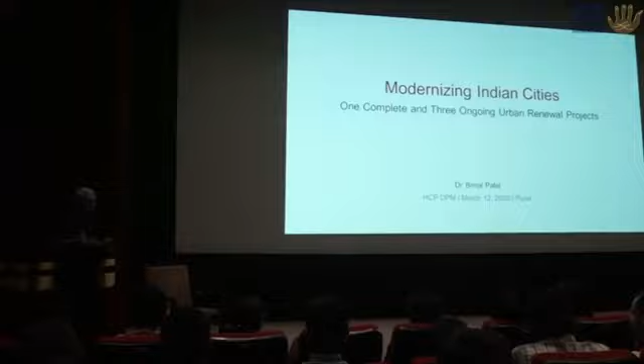So I'm going to talk about modernizing Indian cities. That's the big agenda. I think we live at a very special, important time in India. India is going through an epochal revolution. We are becoming urban, and every country in the world that has become urban has had to tackle the challenge of making its cities function well. We go to all these wonderful cities in the West and like to go there as tourists, but God did not give them these cities ready-made. They too industrialized. The Western world also messed up its cities. You can easily Google and find the history — just look at 19th century cities in Europe, you'll see images. They worked hard, tackled the problems, and modernized their cities. They did this at a different time, with some advantages and some disadvantages.

We have our own advantages and disadvantages. One of our biggest advantages is that we are latecomers to this process, and we can learn a lot from processes abroad. We have disadvantages too, because we have larger numbers, we are a poorer country, and we have democratic institutions far ahead of all the other revolutions that have taken place. So we have our challenges to tackle.

Depending on how well we tackle the challenge of modernizing our cities, we'll either come out of this process as winners or as losers, because countries that have not managed their urbanization process well have got stuck at lower levels of productivity and very problematic social situations.

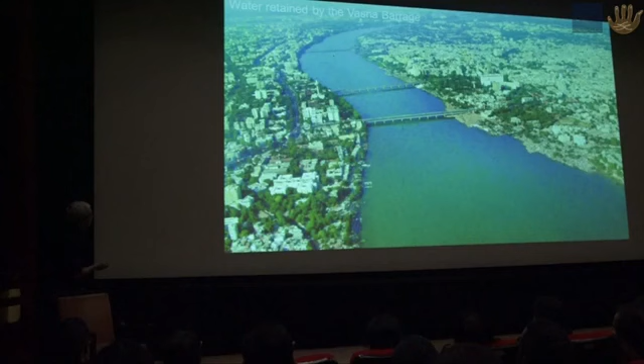So we had a seasonal lake in the middle of the city since 1976. A few months after monsoon we would have water, and then it would go away as soon as the water was used up for irrigation. It would be an empty riverbed, and the river would start looking like this once again.

Then, after that, the Narmada Dam was built, and as Ram explained, a canal was built to take water up to North Gujarat and Saurashtra, and that happened to go past Ahmedabad, just upstream of the city. Once this canal was built, we had the possibility of taking water from the canal and putting it into the river for irrigation.

This made it possible for Ahmedabad to have a perennial lake in the middle of the city. All of this happened without any reference to Ahmedabad — this was for irrigation and flood control, and none of it had anything to do with the riverfront project.

Once this lake got done in the middle of the city, we have this sort of a lake. You can see this river sloping down from here to here. Here's the barrage, and therefore there is deep water here, and then slowly shallow water here. It's like a swimming pool — the bottom is sloping.

We had a landscape full of lakes earlier. Now we had a large lake in the middle of the city. Now we had a lake, but it's not in very good shape.

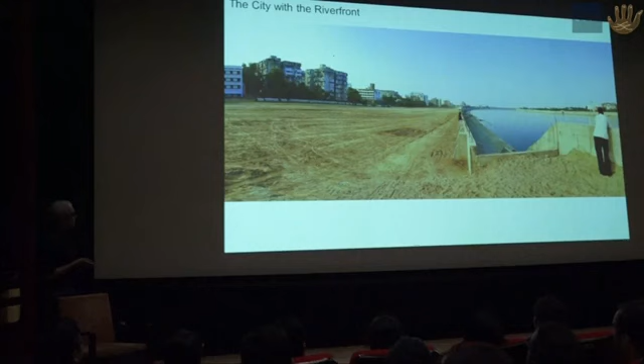On the project, we developed many techniques to visualize the project and show it to people. We would have a photograph like this and then try to show - these were large drawings we made. We made exhibitions of this sort to try and show people what the riverfront is going to be like.

And finally, the project saw the light of day and it happened. Today, Sabarmati River has a riverfront that is accessible for everybody, which means that in this river, we built embankments on both sides and reclaimed land, like in Marine Drive.

This is one picture - you can see the wall being built. This is the reclamation work. It's a huge amount of work. It's not very sophisticated work, but it's just large.

The river used to look like this in 2001. And here you can see in 2006, the work has started here. And in 2009 and '15, and that's now the river with a public realm on both sides of the city.

A river that used to look like this, today looks like this. It has - and like this, it looks like this. So this is lots of space that was created. It's a river without sewage.

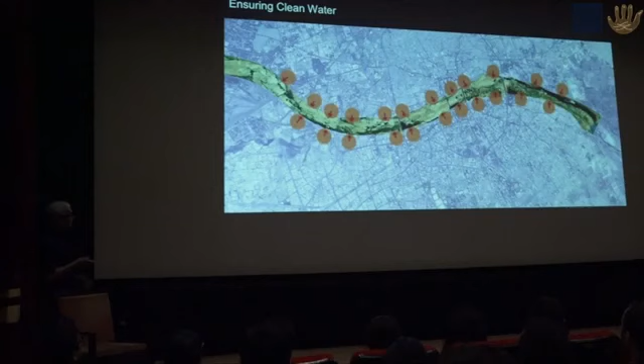All this sewage that used to come in has been diverted through interceptor sewers. This is the sewer being built, and the water is now more or less clean, though there is still some work pending. It's a river for recharging groundwater, and the sewage treatment plants treat the water and put it back into the river so that we have a grand recharge mechanism. This work is ongoing, but there are other plants that have already started.

It's a river without slums. 11,000 families were given housing in all these red spot areas within the city. You can see the houses were of this sort, and that is kind of an interior view of one of the happy homes that was built.

So 11,000 households. The project, I think Ram made a statement, it was not 11,000 crores, it was 1,100 crores, and the project cost was 1,200 crores. This is the cost of 2 5-star hotels. Okay, 2 5-star hotels is the cost of the entire project.

Anyways, no risk of flooding. Ahmedabad river used to flood, and everybody who could afford it had built walls of this sort. Now there is a common wall, and you can see the river in flood here. The lower level is submerged, but next day, after the water recedes, it becomes once again a usable place. It has to be cleaned up a little bit.

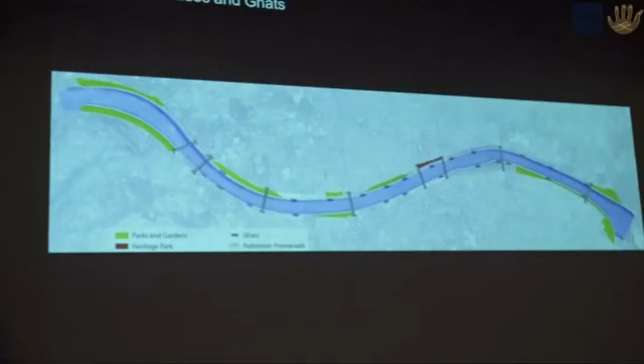It's a riverfront with parks and promenades. You can see there are many new parks along the river. That's the kind of view it was when it was opened up in 2012. It became a place of pride for the city.

Here's in the monsoon, and here's people sitting there. It's a place for all sections of society. You can see here boating and exercising, and there are parks of this sort. This is a picture from 7 years ago, and that's a new park that is coming up shortly.

So it's a riverfront with many amenities. That's a huge open-air market for poor people. It's the flea market of Ahmedabad that you can see here. It's a Sunday market, which it was claimed was being wiped out. Here that's the kind of market that you have in place.

These trees have also grown. They will also grow more. This is a laundry facility for all the dhobis who used to be there.

This project has revitalized the city center. You can see many new projects coming up along the riverfront. All the developers are advertising their projects along with the riverfront. They are also paying for their FSI, so the city has a new income source.

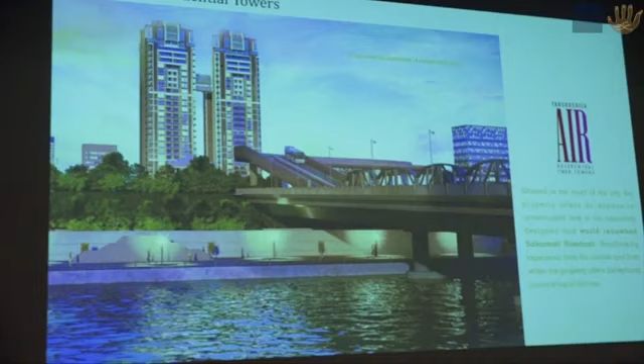Here are some other projects. These are from developers' brochures, and here are places like this from which you can enjoy the river view.

We have a better street network. We used to have a poor street network, north to south, and this new street network was added because of the project. This is one of the views of the streets. Here's another view of the street. There you are, that's another view.

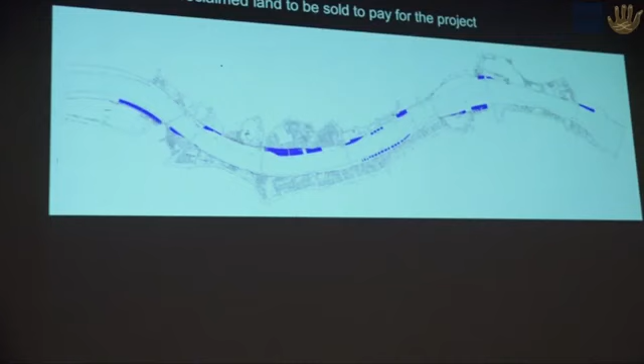It's a self-financing project, no taxpayer money to be used here. It's a project that costs 1,200 crores to build. If you take the housing, it's another 1,100, so 2,400 crores, that's with interest. And these patches of land, the blue spots, are to be sold to recover all of that money. That's, for example, a patch along which small portions will be sold, and maybe something like this will come up.

So it's a project that has made Ahmedabad citizens proud of their riverfront. This is, in a sense, proof that projects like this can be done despite our fractious and difficult democracy. We don't need to be like a very authoritarian government. We can still do projects.

They have to be structured in a certain way. They have to bring benefits for everybody. They have to make sense for a large number of people. And you have to implement these projects well. So that's the proof that some of the rest that I'm going to talk about can actually happen. Okay? So let's start with the Mumbai project.

So that's one of the 3 ongoing projects that I'm going to talk about. So the opportunity—now you see that's Mumbai here, that's Marine Drive here. And normally we see this edge of Mumbai. This is where that big bridge is, and we see the western side of Mumbai city. On the eastern side, all of this is the port of Mumbai.

We think of everything as a zero-sum game. There are activists who say, I will save every tree and everything else be damned. There are activists who say, I will save heritage buildings and everything else be damned. They are like people fighting for their roadside shrine, saying, I will save my shrine, the traffic be damned. We have to figure out ways to turn such zero-sum games, you win, I lose, into win-win games, into situations where everybody wins something.

I think the Sabarmati project essentially came through because nobody lost, everybody won out of it, despite the fact that there were many activists hollering away, saying either this or nothing else, only green space, you can't sell land, you can't do this, you can't do that. Nothing. Eventually, the city people said, enough, we will do this project because everybody gets something out of it, and everybody has to therefore also compromise something.

Everybody can't get everything with nobody compromising. Somebody has to compromise, and that's the art we have to learn, and that's the art we can teach through urban design. Okay, so that's what urban design has to be about. That's the sort of subtext you will see in all of the projects that I do here.

So first, let us look at what the urban design vision is. I'm going to turn on a film, a 2 to 2.5 minute animation that tells you what this project is about. Are you going to turn it on?

That was just a visual of how we believe the Mumbai eastern waterfront might look when fully developed. But what are the ideas underpinning this vision, and what are the urban design elements? Since a large portion of the audience is urban designers, architects, etc., I'd like to focus on some of these ideas.

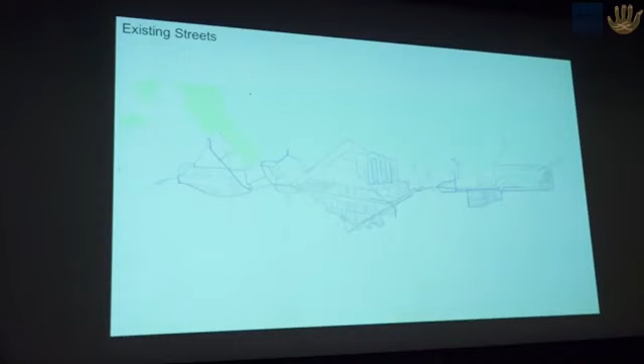Here's the large piece of land we're working with, about 7 square kilometers, and a dense street grid is at the heart of this plan. To draw this, we looked at the existing streets in the port, since the port already had some streets. We decided to use many of those streets, perhaps widen them, using those alignments.

We added more streets and came up with a grid that matched the grid of the rest of Mumbai. So this is not just a grid of streets standing by itself, but integrated with Mumbai's streets. Let's take a closer look at this.

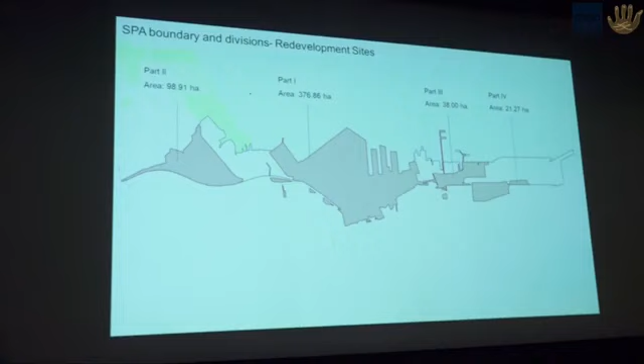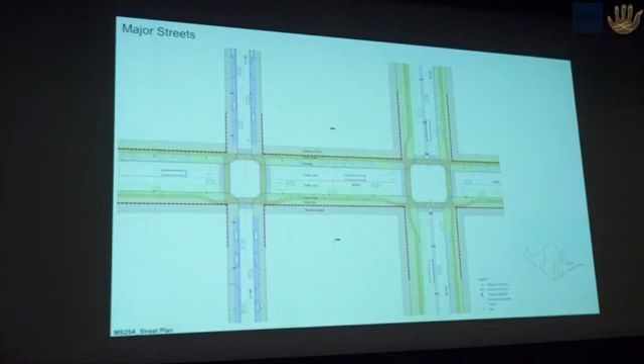Of course, the street network is also hierarchical. It has functional hierarchy, and has been detailed with considerable care. As you can see here, this is the design for the major streets. All the other streets have also been detailed, and this is the urban design vision for those streets.

But what's important here is that we shouldn't forget, as urban designers, that streets are at the heart of any planning assignment. At this stage of our development, the most important thing is to make adequate space for streets.

Though not impossible, it's very difficult to improve a street network once everything is built up. You can see that very clearly. In another project, which I won't talk about today, we're looking at how to improve street networks in existing cities, but we'll not take that up now. Here, this is more or less a greenfield site, so let's talk about how another one like this was done.

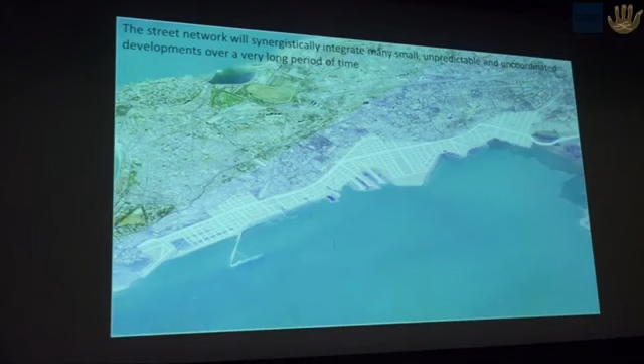Once you have a street grid in place and are able to get that space for streets, cities grow incrementally in unpredictable ways, and a street grid is the only frame that can hold a large urban development together. So we focused first on the street grid. Once the grid is in place, something will come up. The land will get freed up slowly as leases get over, and bits and pieces of the city will come up, and over time it will all fall into place. It's not one grand vision realized in one day, but incremental development, uncoordinated, messy you might say, but the street grid is what holds it in place.

Second, public transit is very important, and more important is to integrate it with your street network. There's lots of public transport planned for this area, but the important thing is to integrate it with the fabric of the city and with the city streets, and that's what's been done here. The metro alignment has been carefully changed so it matches our street network. It takes a lot of work to bring all the agencies together, and that's the work involved in urban design - your coordinating function. You're nothing but a coordinator at that level. Then you see from all the stations what the walking distances are and how you get to them.

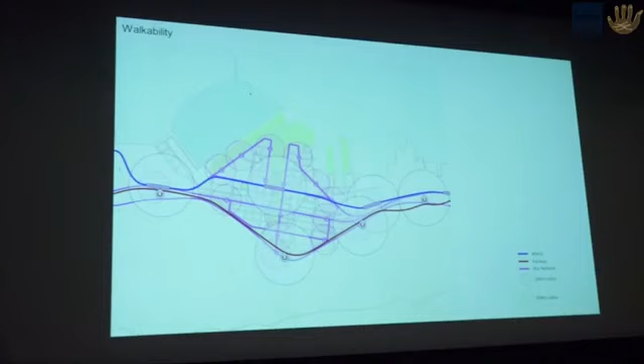Integrated and upgradable infrastructure. Once you have a street network, you can put in all the infrastructure you need - power supply, water supply. You can work out the sewerage strategy and solid waste disposal strategy, and on the street work out the ways to put in all your services. But the key insight is that infrastructure of any city in the world is not built at one go. Nobody builds world-class infrastructure at one go - everybody improves upon their infrastructure. So for all the people who ask, have you done the infrastructure, I say, my friend, which city in the world has built its infrastructure on day one?

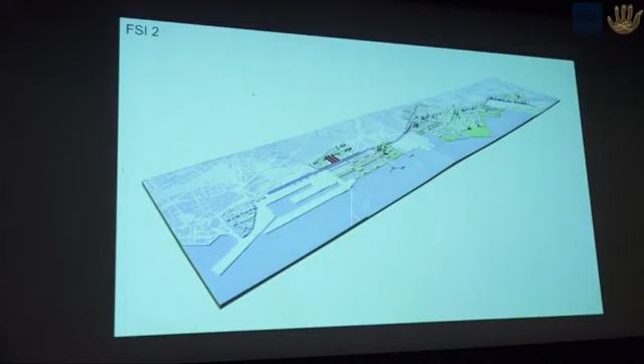But we believe that later on, the next generation will say, oh my God, these people were very timid. Let's put in more infrastructure and build more. And we believe that after that, they will build even more.

Even when they come to this level, they'll be nowhere near Manhattan, because that has even more floor space. That doesn't mean there are more people. What happens is people become richer and they consume more floor space as societies become richer. And that's the story the world over, including India up to now.

Adding more floor space does not add load to infrastructure. Adding people does. So don't limit floor space. If you can't limit people, just add more floor space. I don't want to get into much detail here.

Now, here's a very important point of this plan. Indian cities—I'd like you to look at this particularly carefully, because it's a very important thing that all urban design people should understand: we use our land very poorly. What do I mean by that?

If you take Ahmedabad, I showed you, and we took these 500 by 500 meter squares for study. If I take this one square here in the center of town, right next to the river, that's what it looks like. I'm sure Pune looks like this too, and most of Pune looks like this. If you were to study the land use here and divide it according to the categories I'm telling you—not what planners use, not residential, industrial, and all that sort of stuff, but like this.

First you find out how much is in public streets. This has got all completely washed out here, but about 16.8% of the land is in streets. I'm sure Pune gives you similar numbers. How much in public open space? Very little. Streets and open space together make the public domain of a city, and most Indian cities have no more than 20% of their land in the public domain.

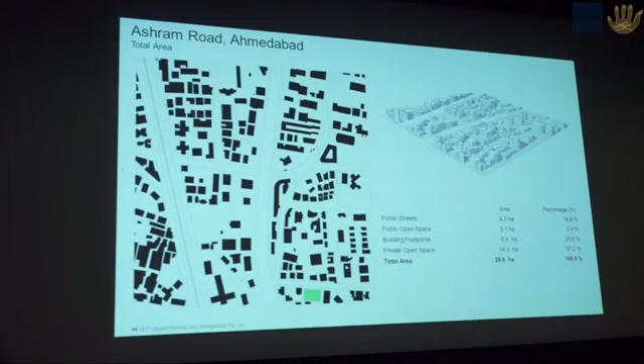All that 57%—sorry, there's something wrong with the slides here—but if you look at this, all the 57% is the private open space that we are forced to leave around buildings because of building bylaws. And that constitutes a waste in Indian cities. All that red land is the private open space that cannot be used legally, and this we end up using suboptimally. You see, all our cities look like this.

They have lots of tiny fragments of space like this. It all adds up to 57%. Nobody makes that calculation when they are making the rules. But the rules end up forcing you to do this.

And how do we use these spaces? They are not very well usable. You know, as designers, look at these spaces. These are not, you can't grow trees, you can't play a cricket game here. I mean, you can romanticize about this, but when space is scarce, this is a waste of land.

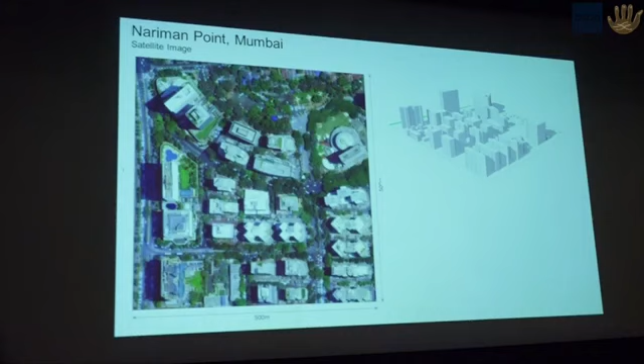And I urge urban designers to actually walk around in cities and find out how these slivers of land are used. You take Mumbai, you have the same story. You take Nariman Point, the costliest piece of land in the country. This is what it looks like. Once again, if you look at the figures, you see 53% of it is in private open space that cannot be used. Ridiculous.

It's very easy to do this research, it's Google Images, nothing else. Other cities in the world, take London, go and check it out. Here you have almost 30% in the public domain. So already doing 1.5 times better than us.

No wonder their streets are walkable and we all go there as tourists. And their building footprints are, what's that, 65%? They know people want more ground floor space, so they allow it. Planners don't stop them from using it, they actually allow them to use it.

And then you have private open space, which is very little, which is 4.8%. You will see that in every city in the world.

San Francisco here has 32% in public streets, and parks and gardens 36% in the public domain. You can see 61% in building footprints. Now this will change as you take a square of the city, but this is an average. And private open space is this.

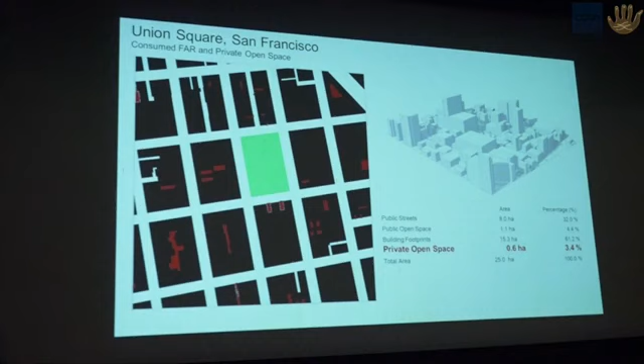We can say that generally speaking, in Indian cities, that's the situation: 20-25% in building footprints, 20-25% in public realm, and a big waste of 50 to 60% in private open space, and this is done by bylaws. Man-made. There's nothing that tells you to do it this way. Now, in western cities, 50 to 55% in building footprints, 35 to 40% in public realm, and 10% in this private open space. No wonder those cities work better.

So we have to learn how to make cities of this sort, and this is what their cities end up looking like when the land is used efficiently. That's Lyon. Look at this pattern. Go on Google sometimes. It's a terrific pattern.

You can see that all the private space is also really well shaped in the form of courtyards here. You can see you have wonderful streets, you have parks, you have gardens, and you have a vast amount of floor space. Okay, that's what we have to try and do.

Now, our cities look like this. They are neither garden cities, nor they are cities. And here's Mumbai. I mean, can you believe it? This is a ridiculous waste of land. And this will be Pune, and this will be Delhi, and this will be Calcutta, and this will be every Bangalore. Everything is like this. Ridiculous. And we haven't paid attention to this issue for years.

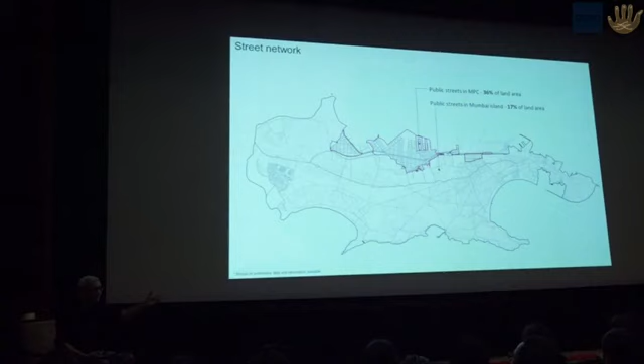And yet I have some people who are purists complaining about public space. This is a development which we are going to do where we monetize land but put 62% in the public domain. And if I take the building footprints, 24% in our area, 27% in the rest of Mumbai. So we're not putting in more, we're not concretizing the place.

What we are doing is we have undevelopable private land at only 12%, in the rest of Mumbai it's 43%. We are taking all that waste and turning it into gold of public domain.

Now that's the same figure here, giving you 1.5 FSI, 1.33 gross FSI. So that's what the Mumbai plan is. That's, I think, the winning issue in this plan. And this is what I feel like saying, well, this is how the mill land should have been developed.

Many urban designers want to be concerned about the big problems of our day. I am also concerned about the big problems of our day. But I think our job is not to take up flags and go out as activists. Our job is to use design to solve problems. And that's what I propose we are doing out here.

Okay, finally, urban design form. Our cities, anybody looks at our cities, they'll say they're not planned. They don't have any particular form. They're haphazard, disorderly cities. Take one drive around any Indian city and you will say this, but take other cities in the world, well designed, with some character, some urban form character.

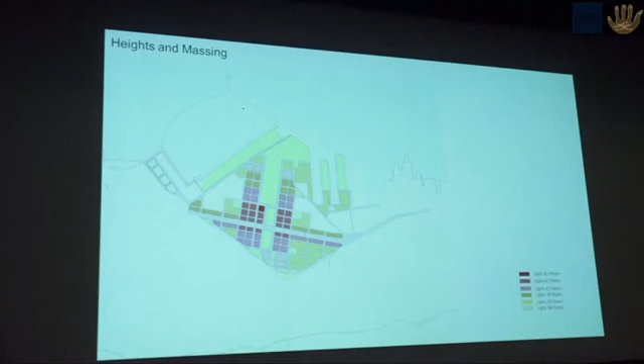And the Mumbai plan is designed to do precisely that - I'm losing contact with this - it's like the plan for Ballard Estate. All the blocks have been well thought out, the floor heights are fixed in all of these, so the volumes are fixed, and it has been thought out in careful detail. Now the architects can go in there and build within that volume.

But none of this is possible unless you have good bylaws. So we had a chance to write a new type of bylaws here, and we do not use text-based rules like our normal bylaws. Our normal bylaws look like this - not a single drawing mostly in these books. They are all text-based, written by administrators and bureaucrats. These are not drawn up. If they are concerned with form, you'll have to draw up your bylaws. That's the opportunity that this project provided. We made a very simple, easy to administer sort of building bylaws.

I won't go into details, but here if you can see this drawing, it's not very clear, but here are the plots. If I zoom in, sorry for this washed out thing, but these are the plots, these are the divisions of the plots, these are the setback lines that have been drawn up, and these are the volumes, the development envelopes within which people have to build their buildings.

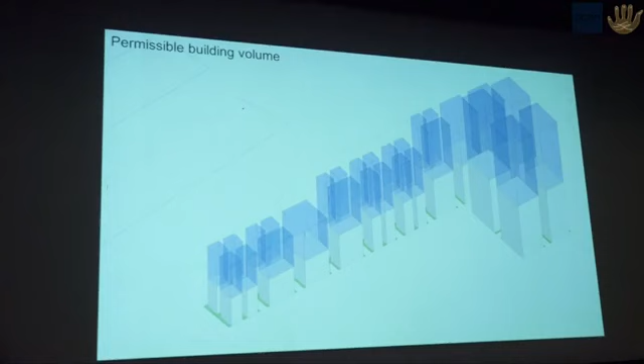So from day one, the volume within which the building has to be built is set. We know which are going to be the tall buildings, the lower buildings, the higher buildings, etc. All the neighbors know what's going to come up next to them. Inside it, this is the amount of floor space that you can fill up in the volume. Nobody will build buildings like this - the architects will all design separate buildings according to the needs of the client and the site-specific area, optimized to meet the needs of the owner.

Then you would perhaps get a landscape like this. This is just speculation - every architect will do something different. The bylaws actually look like this.

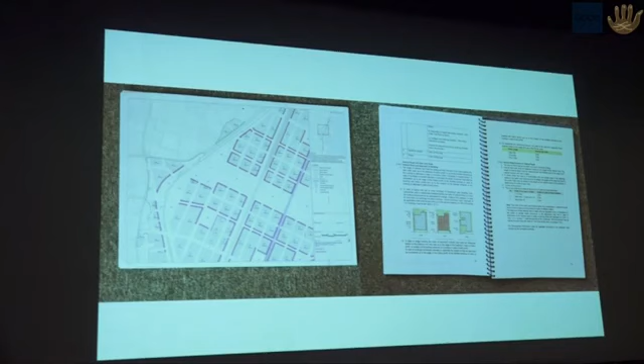There's a set of drawings and there's a set of text-based rules. You will still need text-based rules for certain standards like engineering standards, etc. But height and bulk regulations will all be in the form of drawings like this, which indicate clearly and make it easy to define the development envelope.

Many cities of the world do this. Look at the Singapore plan, you will find online. This is how bylaws always have drawings. Ask for bylaws with drawings. That's what you have to do, or some of you might later on do more of this elsewhere.

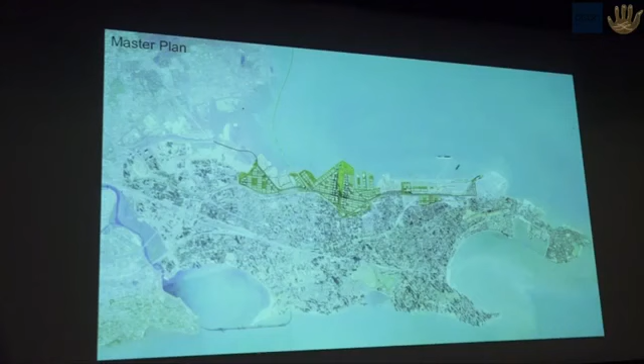I would like to suggest, I've told you what this plan is about, and if it finally goes through, it's slowly making its way through the whole process. Recent political changes have made a little bit of a slowdown, but it's slowly moving ahead. Someday if this develops and this plan is adopted, I think

this plan, in a sense, proposes a new urban design paradigm for India. We have been writing our bylaws and making our plans, which is the DNA of our cities, in a way that gives us the cities that we have today. The plan and the bylaws already define the city. We are trying to write up a plan and bylaws that define a different sort of city. And that's what I wanted to say here.

So we stop, first one done. Oh, that's too much. Vishwanath Dham, Varanasi.

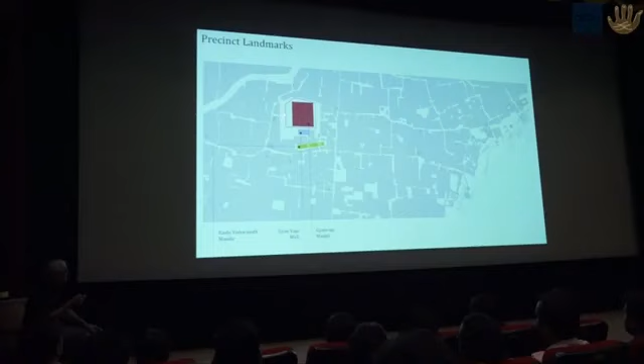If you look at the drawing, that's what it is - that's the barricade, that's the mosque, that's the character of the precinct. It's densely built.

There are homeowners, shopkeepers, priests, high priests. There are sadhus that come here. Maybe the battery is low, but that's okay. There are pilgrims and many tourists in this area who come here.

Oops, sorry. What was that?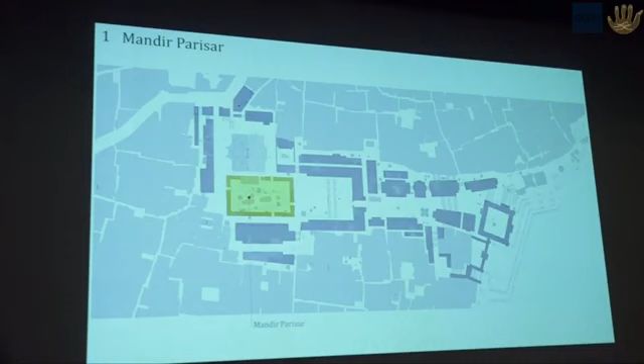The parisar is simple - that's the yellow area I'm talking about. Presently the parisar is that small, that's the sort of ambulatory around it. You can see it's very tight - hundreds of thousands of people come here, and it's a very, very tight spot.

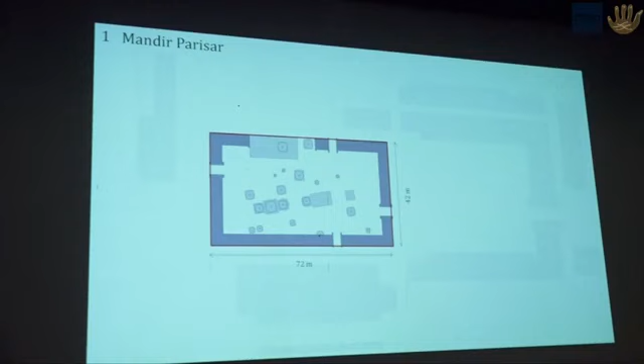So we took that area, we saw the axis of the temple, put two squares around it, straightened it out to align with the mosque and with the important structure next to it, made it a little larger, and then put an arcade all around it, essentially creating a larger space around the temple and a parisar that would be pretty much in the traditional form. And that's where it is.

Sorry, these drawings are not going to come up here very clearly, so I'm just going to move on to the next one. Hopefully this will come - it takes a little long on this computer. Forget it, next one, you'll see it later.

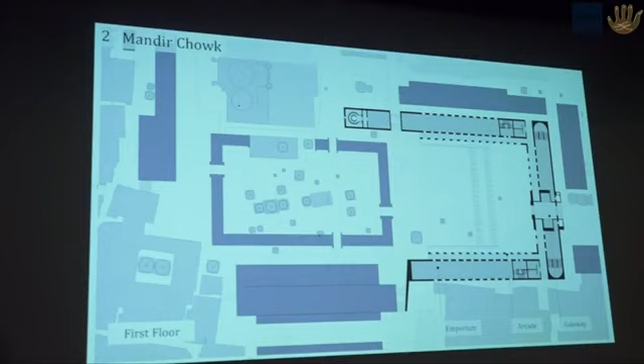Outside it we have this chowk. So we took this rectangle that we had put in, extended it twice the amount here, and created a civic space outside the parisar, and built a building around it that would hold lots of facilities - for example, a large number of toilets, because you need a huge number of toilets. It's pretty straightforward what you want to do when creating facilities. On the upper level, maybe shops, maybe an exhibition place, an emporium.

I'm not going to wait for this drawing - let's look at it later so you'll be able to appreciate what this is. There are many approaches to that area, but once on the road there is actually just one approach - a street like this to this big temple - and that approach has been improved.

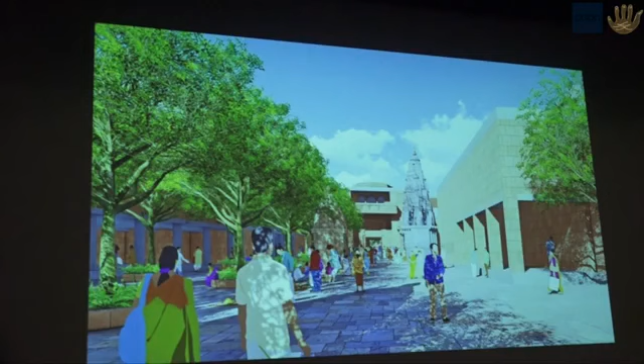Then you have an approach from the Ganges side here, which is really on axis to the temple. You want to come here and create a gateway, and from the gateway the first thing you see is the shikhar of the temple. The gateway is designed using one of the local gateways as a model, so it reminds you of that area.

But I think now there will be a different approach. There's a wider, larger space, you can climb up these steps. It has to be a pleasant experience so that you come here for a spiritual purpose. If all the time you have to look down on the floor and see where you're walking—some people romanticize this, but I think that's not the idea. So that will be the approach that will lead you slowly up to the temple here.

Why are we not moving?

Here you are. So also some escalators for older people to climb up here. And that's the view from when you're up there looking down at the Ganges. There's also cultural civic institutions along the path that you can see here.

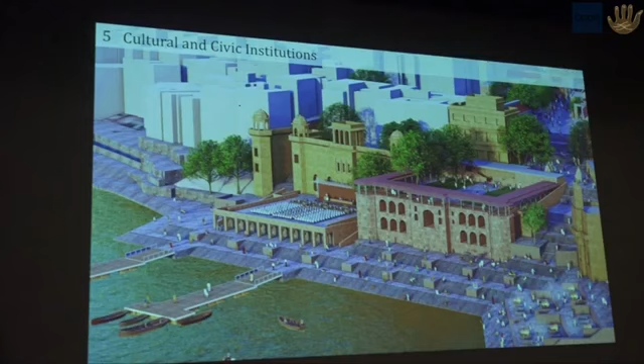Behind that there's this old hostel which can be restored and turned into use. So that's what this area will be—eventually a terrace up here, that's the old structure, the hostel at the back, and a stage here for performances, etc.

Along the path there are many other exhibition galleries and places like that. I'm going to leave this drawing and move up here to this place. The ghats themselves can be much improved. They haven't been taken care of for a long period of time. There are three ghats that we're going to focus on, not all of them.

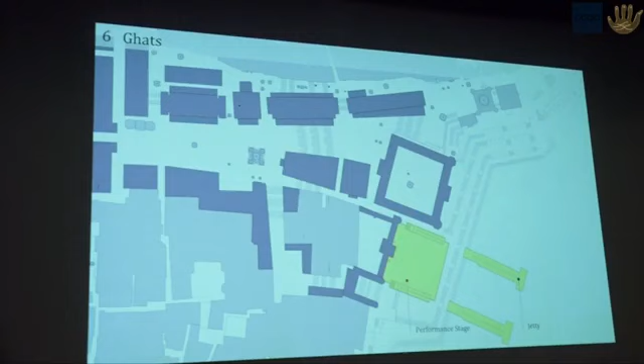First remove this sewage pumping station and bring this old structure back into the fore, and also create some jetties and a performance stage, so that you really get a much nicer area there. That's Manikarnika Ghat, the most important cremation ground, and that also can do with much improvement. It doesn't have to be like this.

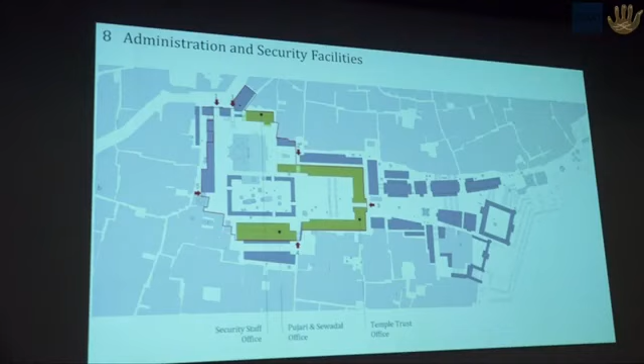So here's Manikarnika Ghat, and that's the development we're talking about—pilgrim and tourist facilities, lots of pilgrim facilities like food courts, guest houses, places to leave your baggage, places to leave your shoes, locker rooms, and so on. Lots of administration and security facilities are required, offices are required. So essentially it's a lot of logistics and functional improvement in this area.

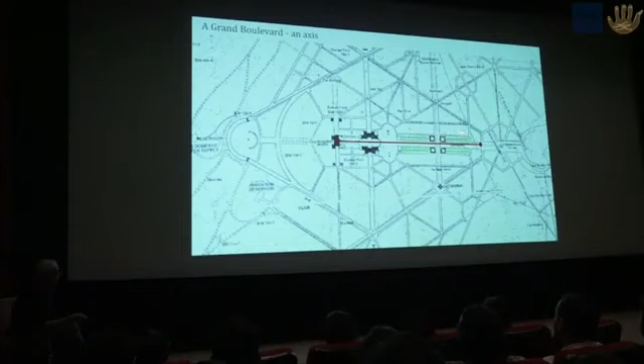Standard Beaux-Arts method of designing it: you have a grand avenue with trees, on two sides you set up an axis, then at one end you put a focal point - the Viceroy's residence was at one end with the north and south block. On the two sides they wanted to put up administrative buildings for all the offices of government, and at the end they had India Gate. So that was the basic architectural device that was used.

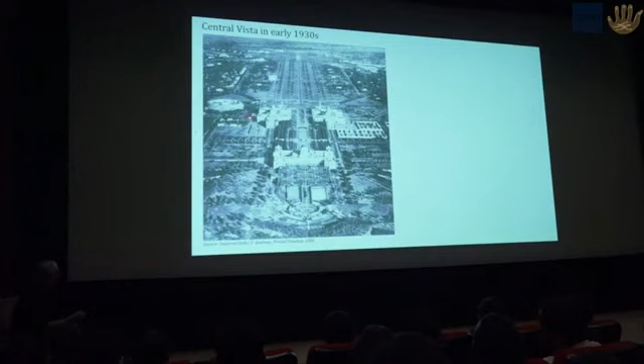That's what got done in the early 1930s. You can see here that's the space. The administrative buildings couldn't be built. That's Rashtrapati Bhavan, that's the Mughal Gardens here, that's South Block, North Block, that's Council House. Rashtrapati Bhavan at that time was the Viceroy's residence.

The Viceroy's house became Rashtrapati Bhavan. The statue of King George V was removed from the canopy - the canopy stands there at the other end. Council House became India's parliament, though it was never designed to be the parliament. And North and South blocks house the most powerful ministries of the government of India.

Post-independence management of the Central Vista was, however, very poor. It lacked any sort of comprehensive, inspiring architectural vision.

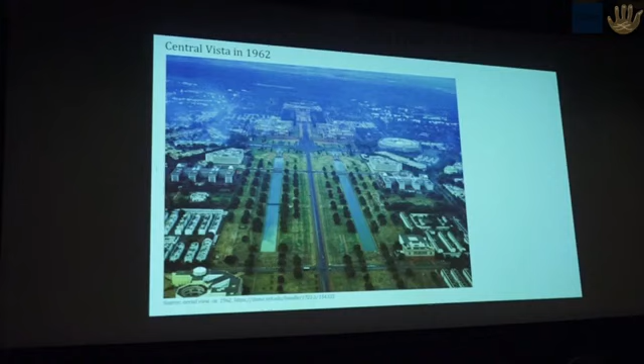This new street was added, and this is Krishi Bhavan, Udyog Bhavan, and then those barracks-like structures, National Museum, various other such things. And you can see these trees here, 2 lines of trees. So what we had inherited became like that.

Now, if you look at this, it's a disorderly layout of buildings that we have added out here. That's very clear, it's incoherent architecture. It's all different ones, don't add up to anything. A hodgepodge of different uses. You have residences with it, that's the vice president's residence, the administrative facilities, cultural facilities, all rather incongruent and without any particular order.

No space for all the ministries to be housed in the Central Vista. Only 22 of the 51 ministries house here. The rest of them are scattered all over Delhi, meaning that everybody has to travel long distances to meet, which means that they often don't meet and operate in silos.

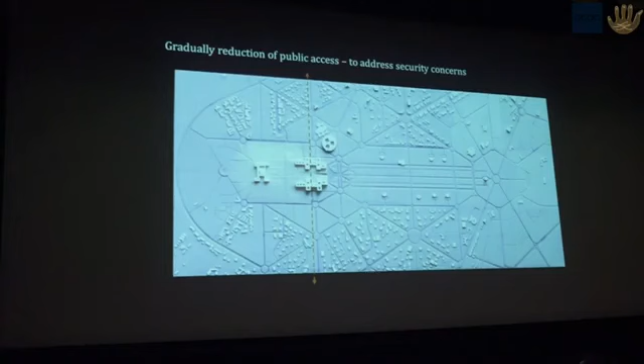And even the access that people used to enjoy, you could walk through these buildings, has reduced because of security reasons. Actually, the Central Vista itself is encroached upon by these bhavans to create space for parking. So from behind, the compound walls have been opened up and parking lots have been created on the other side, and some infrastructure has also been put in.

Over the years, many people, many institutions have demanded that the Central Vista should be better administered, better developed, better maintained. In fact, people have written administrative notes saying that these old buildings should be torn down and new ones should be built, and that its heritage should be protected. Nothing was done, like in the Varanasi case. Something is being attempted right now.

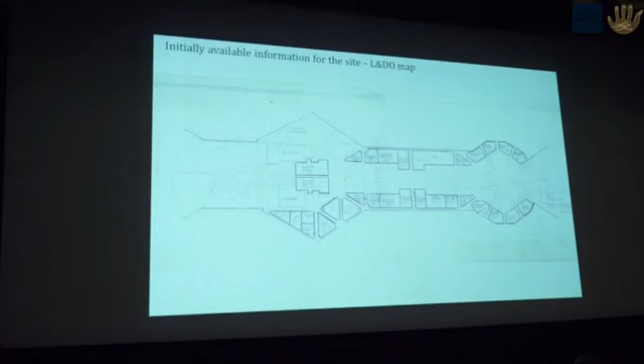So what's this project? Let me explain to you what the project is about. Once again, the master plan for the Central Vista project started with a sketch developed in response to very broad requirements, like the Kashi one that I was telling you about. Here you have all the information that was provided. There were thankfully good history books, good historians who have studied the buildings. From that we could find old maps, and thank God for Google, because without Google what would we do?

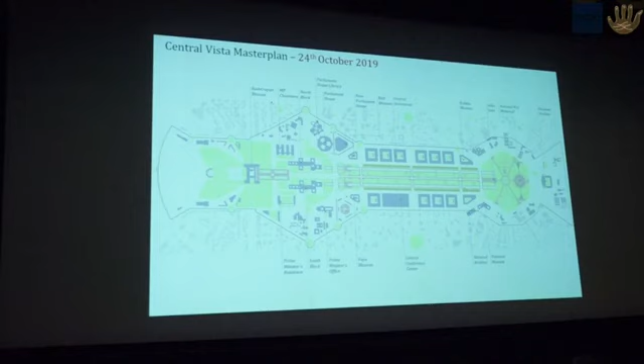This master plan has evolved over the last 3 months and will continue to evolve as we go ahead. Here's what it was on 11th October and 24th October, and it changes on 24th November and 24th December, and so on. What I'm going to talk to you about is the 3rd of February version of the plan.

As we continue to work on it, it will evolve. Only people who have never done a plan will believe that you can make one perfect plan to start with. You cannot. Only somebody who has not designed a house believes you can ask all the family members what they want and come up with a perfect plan. This is ridiculous, you don't do it like that. We know design is an iterative process, and that's what's ongoing right now. Here it is, the 3rd of February plan, and that's what it looks like.

Now, what are the objectives of the Central Vista project? There are 6 objectives. Let me go over them one by one. Modernizing Parliament's facilities is the very first one.

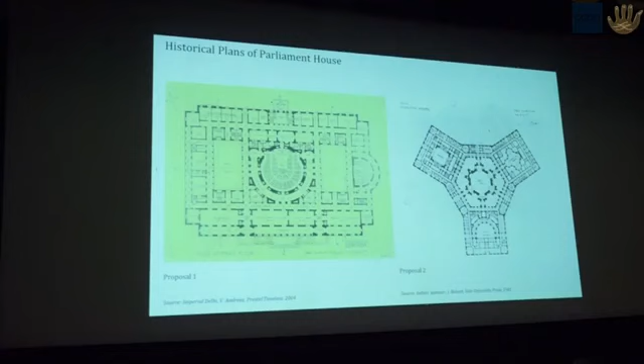If you look at Parliament House, it's this round structure that we all know very well. We tried to understand the existing facilities by looking at historical drawings. It was not supposed to be round—Baker wanted a triangular arrangement of this sort, but Lutyens didn't agree, and eventually a round building was built. There are very old drawings available, but not in a usable form, so we redrew all of them.

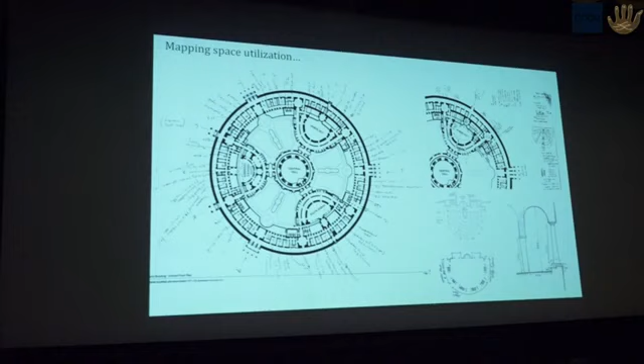These are old elevations that we've redrawn so we can start appreciating their architecture a little better. Of course, all the rooms, adjacencies, and space utilization had to be studied, because in India we don't have maps of how these management systems work. We have to study all the protocols—who goes from where, does the president enter from here, does the prime minister enter from there, and so on.

This is the way it is because it's a complex building. We don't understand all the furniture—people sit down here and that's the main job, to debate. So we have to understand that well.

We are trying to understand the later additions. You can see there used to be beautiful windows bringing in natural light—they have since been closed, and there's this glare from artificial lights instead. Baker added these 2 floors on top in '56, afterwards. Now whatever expansion could be done has already been done.

We studied the expansion possibilities because India's Parliament will at some stage after 2026 be expanded to have more members. Today there are 552 seats. You can see that this corridor at the back, behind the columns, has already been filled up with seats. There is absolutely not a single seat that can be added, and that's one of the problems.

The central hall of Parliament is actually like this. That's where twice a year joint sessions are held, but the rest of the year it functions essentially as a lounge. This is the place where, if you're a friend of an MP, you will sit down and have a cup of tea, served from this corridor here. This is not the furniture you would have in a lounge, and you can understand it's not very comfortable to sit at a place like this and have tea and coffee.

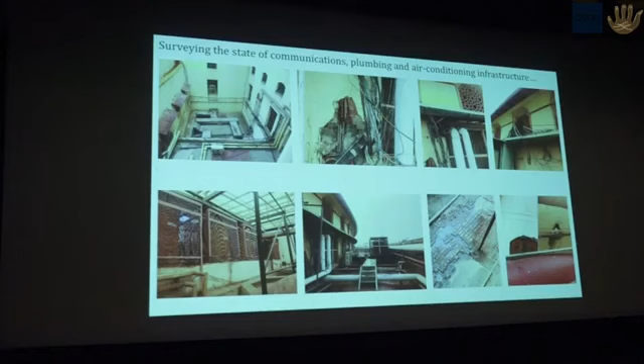Seismic risk is definitely there because the risk has been ratcheted up—the zone has changed here. Since there are no drawings, the building cannot be certified to be safe or unsafe, but it's wise to assume that major retrofitting will be necessary at some stage.

The conclusion of this was that this is a terrific symbol of our democracy, but if we want to expand seating, if we want infrastructure modernization, and structural safety, a new facility has to be built. Then this present building can be appropriately retrofitted and used also for parliamentary functions. So the two would work together is what we are thinking of.

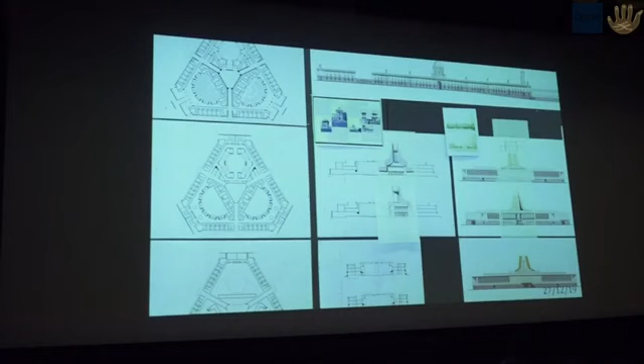We looked at this plot next to it. It's a triangular plot, and a triangular building made sense here, given all the functional requirements. Design for this is also ongoing, and if you look at our studio, there are sketches, models of all sorts. I'm showing you plans that are not finalized. We have to tender out soon, but it's still evolving. So I'll show you halfway work.

That's what it looks like. This whole triangular plot is presently also a compound of the parliament. This is not a garden here, it's a parking lot, and infrastructure is out here. So we're going to remove the parking, remove the infrastructure, and build a new facility out here.

Officially, I might just mention that officially this plot in the development plan says garden. That is why a land use change is required. Presently, in reality, it's not a garden, but that's what a lot of the debate is about. Very often people forget that files are often outdated.

In any case, here you have the Lok Sabha, Rajya Sabha, the central hall, Lok Sabha, Rajya Sabha, and a lounge here. We are not going to have a central hall. The Lok Sabha is designed to function as a joint session hall, so it has the capacity to seat 1.5 times the number of people, and I'll tell you how we are doing that. That's what the plan looks like.

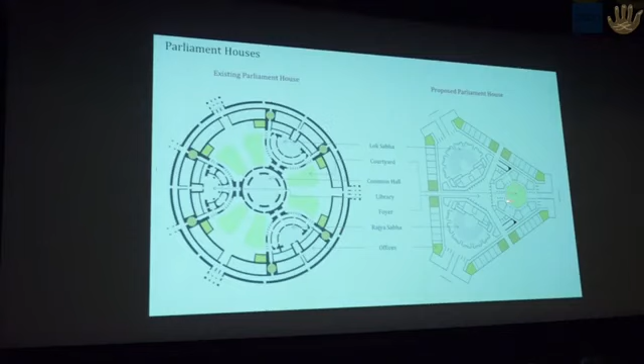At present, I'm not going to go into details here. That's the Lok Sabha chamber, that's the Rajya Sabha, that's the lounge, there's a central foyer, there are offices all around on this side. Actually, it is much like this plan here, which has offices, a corridor, offices all around Lok Sabha, Rajya Sabha, Central Hall, and courtyards here. We'll have just one small courtyard in this building.

That's what the Lok Sabha chamber will look like in phase 1, and there'll be more seating in phase 2 when the parliament is eventually expanded. That's what it looks like, the first floor plan. That's the second floor plan. I'm not going to go into details here.

And of course, we are very interested in making it a geometrically rigorous sort of plan. So it's a 3.65 meter module, finally, after many iterations, we discovered will help us do this job. That's a section through the building. Once again, this is evolving, and many elevation studies are going on.

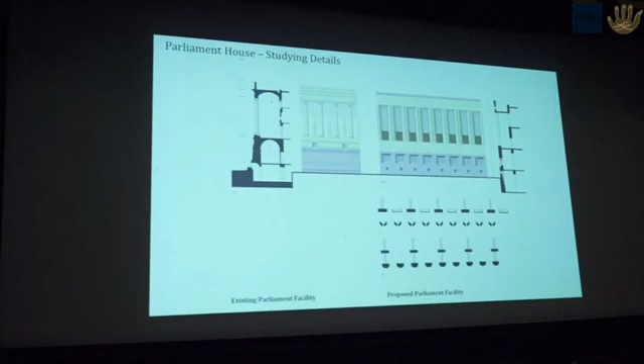We are constantly referring to the building next door. I explain to people saying that we want the two to be related, but we don't want them to be identical twins. We don't want them to be siblings either, but certainly we want them to be cousins of each other. So we are trying out many different things. That's just one quick image of what the two would look like together in this place.

The seating layout, we studied many seating layouts world over, and decided to continue with the present horseshoe-shaped seating here. This is just a comparison of the size of the present hall and the new hall that is being built. You can see present seating is very poor.

You can see here, first of all, it's a bench type seating, continuous benches of this sort. The seat size is quite mean. Only the front 2 rows get a desk. The rest of the people don't get a desk. You have to walk in front of other people and reach your seat, which is very uncomfortable and disturbs everybody. Of course, you cannot give modern equipment like touch screens, etc. If you don't have a desk in front, there's no technology.

And so what we are proposing is that there will be benches with only 2 people sitting, but they're wide enough so that 3 people can sit when there is a joint session hall. So you get 1.5 times the capacity. Everybody will get a desk, there will be no movement in front of people, and so on. So I'm not going to go into details. There's lots of furniture, these are mock-ups, furniture studies.

This is mock-ups of what the ramp will be like. We are doing away with the steps, etc. The technology we are working with, using a very good acoustic design firm from San Diego.

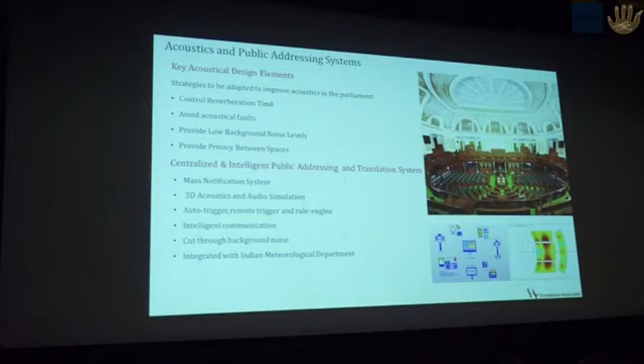You can set the mood of a place by the acoustics. This place has wonderful acoustics. It's very different. You should see the acoustics in the present parliament. It's very poor. All they manage is no echo, but besides that there's nothing much there. There's lots of technology that has to go in, like voting systems, audio and visual systems, etc.

I'm going to talk about all of that. Of course, the building has to be celebrated. It celebrates our nation and democracy, and maybe someday it will be lit up with laser lights going on. So that's all I'm going to say about the parliament right now. There's a lot more, but I want to go over the plan as a whole.

In this plot here, it's proposed to build chambers and offices for parliamentarians. Presently, parliamentarians have no offices for themselves. Of course, the parliament building has offices, but only a few members, the ministers, etc., get offices. The rest of them don't. So in these two plots, there will be 1,000 offices for all the parliamentarians built here with adequate parking, etc.

Now, the other big objective is to improve productivity and efficiency of administration. As architects, all of us know this is very important, and architecture plays a big role in productivity. That's what the central secretariat is being built to improve. What do I mean by that? There are many books continuously coming out explaining how the architecture of a place will affect productivity and efficiency. We know this very well, that for productivity, what you need is cooperation.

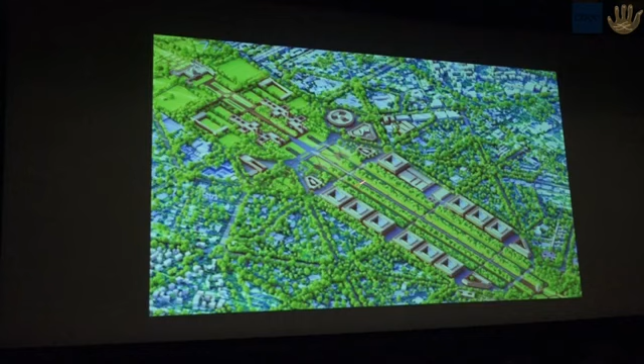So that's all that is being attempted here, and that's what the Central Secretariat is about - that's that place where you try to make it more efficient. The office buildings, there are 10 office buildings here. I'm not going to go into too much detail, but they will house all the ministries here.

It's a transit-oriented development. What's important to note is that two major metro lines pass through the center here. There's an underground station here called the Central Secretariat Office station. There will be an underground people mover that will connect all the buildings to the station, so most of the employees can come here by metro and easily get to their office, much in the way that airports in the world have a people mover to move from terminal to terminal. Think of Singapore, think of Dubai.

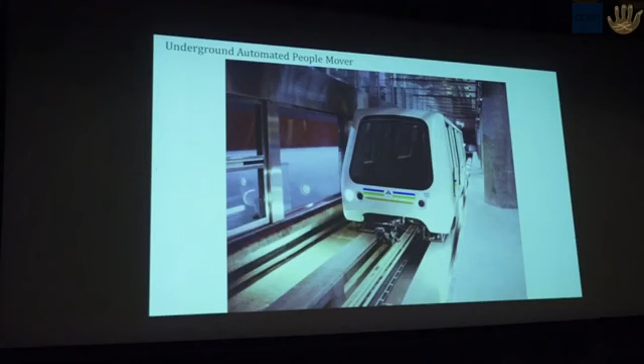This is not a very fancy system - actually it's not even a rail system. It moves on rubber wheels, but it's powered like this. You can move 20,000 people in an hour from the metro to their office. Go to your basement level, go up escalators and go to your office. So you don't really need to choke up the streets, and you can enter and exit with ease. The buildings are all inside secure compounds, 4 plots like this holding the 10 buildings.

You can see this one here. I'll go into it in a little more detail. If you look at that, that's the 3 buildings here. All of this is within a secure compound. Mind you, these buildings are inside presently walled compounds. No public space is being encroached upon.

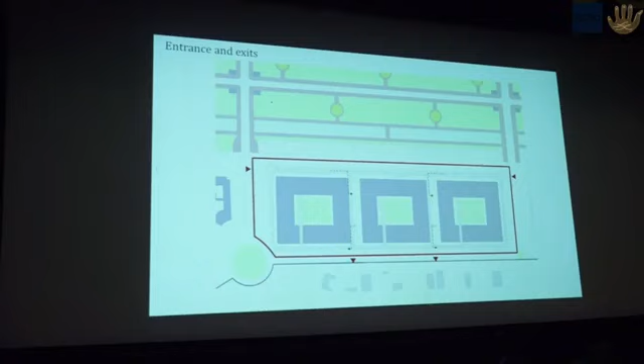This presently already is walled. It's got buildings, only poorly shaped and poorly laid out. There's a loop road inside so that you enter this site from 4 or 5 places. There are accesses to the basement, one continuous basement half a kilometer long, so obviously you get lots of efficiency with lots of car parking.

That's the metro connection to the people mover. There's amenities, there's storage and utilities.

If you look at one building, these are large buildings, 155 meters by 134, with a big courtyard in the middle, donut-shaped buildings, with large trees in the middle. You might have noted in the basement that there's no basement in this area, so you can really get big trees. And on the ground floor, you have circulation through the building like that.

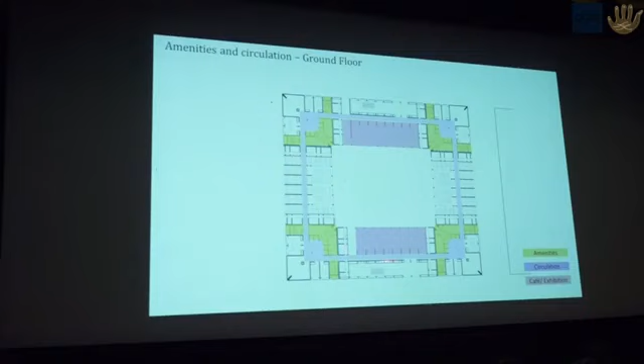It's a simple building, nothing complicated here. It's all rationality and all efficiency here. These are the amenities, on the ground floor, exhibition halls and cafes.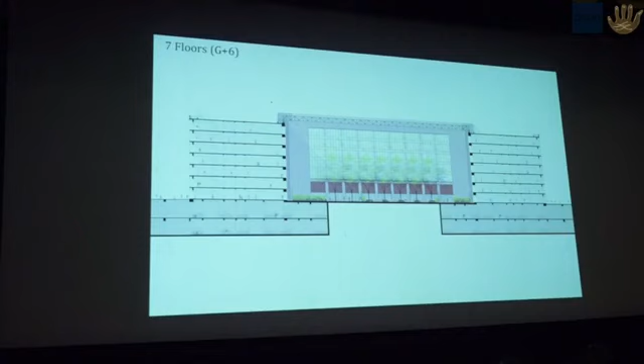Many elevation studies are going on. The important thing is it's lower than India Gate, these buildings.

That's the central courtyard, think of Habitat Center but with a larger courtyard. There's also a central conference center planned here, and the National Archives, that's sort of part of the administration buildings.

That's an old Lutyens building here, which will be preserved, and additional, so that's the old building. That's what it looks like today. We'll, of course, refurbish it and retrofit it. It has wonderful spaces in the interior, but obviously this is not enough to have modern archives.

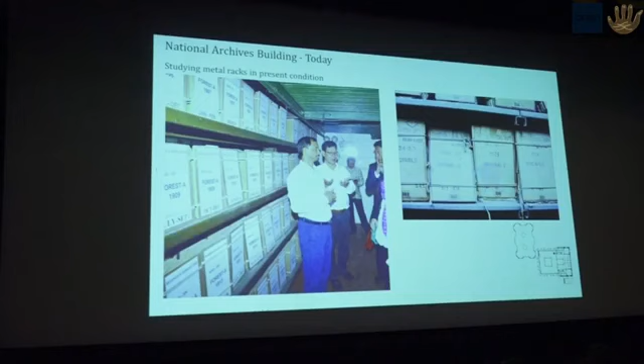Presently, there is not enough storage space. A new facility has been built next to it, but it's not very much in keeping. So that new facility will be brought down, and a more efficient facility will be built next to it.

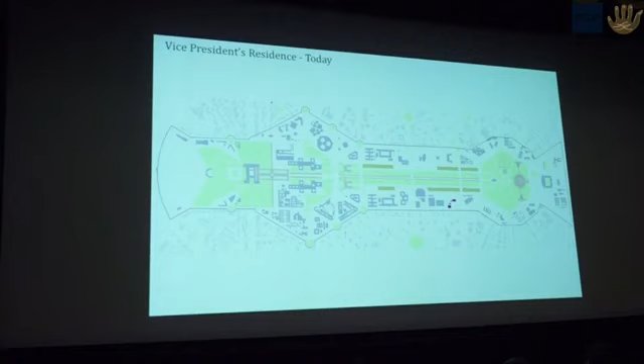Then the idea of giving adequate facilities to the Vice President and the Prime Minister. The Vice President's residence presently is here. If you were to go there, you would immediately, as architects, say oh, we can do better than this, in the sense of just sheer facilities. He has no adequate offices, there's no adequate space. It's all built on a temporary basis and rather poor, like all the office buildings that are there.

So this plot was identified. It presently has hutments in this place. It's north of North Block, and the Vice President's residence will come up there, this site here. So that is nothing more about this, because we haven't detailed anything more than this. That's just a sketch at this point.

Facilities for the Prime Minister, he lives elsewhere. These 2 plots were identified. They also have hutments presently. The hutments will move, and the Prime Minister's residence would come here. Of course, that would give an opportunity to connect everything at a subterranean level so that VIP movement doesn't affect the rest of the people.

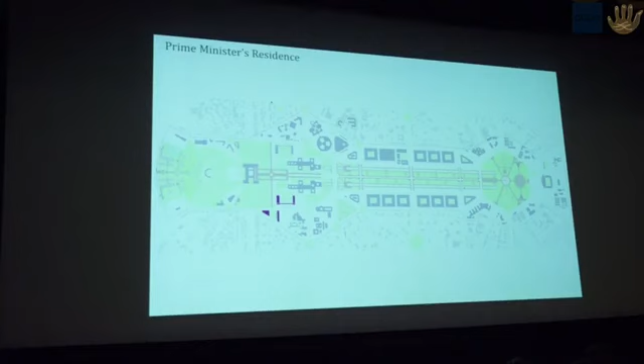There's hutments in this diamond-shaped plot. Once again, it's a prime plot. You can see on one side is the Parliament, and the other side is this. Here, of course, we will get the Prime Minister's office and a garden here with helipads, etc., because you need adequate offices.

The present offices in South Block simply don't have enough space. Any modern facilities, for example a conference room or a meeting room, it doesn't have anything like that, so you need to put that in. Refurbishing, better equipping the Central Vista Avenue is another objective of the project.

The avenue, by which we mean this garden in the middle, is very important but currently has haphazard parking, a very tired landscape, poor paving and footpaths, ad hoc vending areas, no facilities for tourists, poor quality lighting, and inadequate signage. We can do better than this, by we I mean as a nation. This water body is dry most of the time.

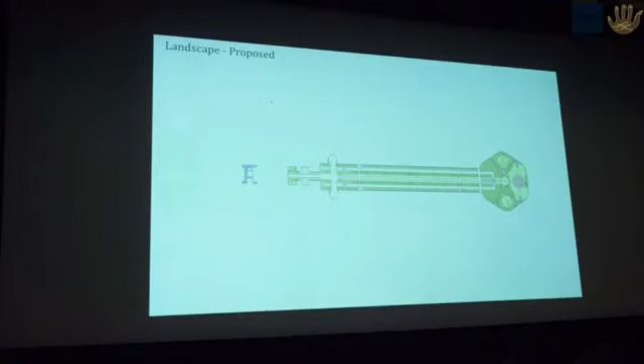So that's the plan. I'm not going to go into this in detail, as each of these could be a presentation by itself. That's the proposed landscape - it will be livelier. Rashtrapati Bhavan already has a better landscape, and we'll have a better water feature and more facilities for civic users and tourists.

Once again, these are things still being worked out, because the phasing of the work is such that we have to work on Parliament and the office buildings first, since they want them ready by 2022 for the 75th anniversary of India's independence.

So these areas will have better, more organized parking, pathways like this which are already being built, and better signage - I understand using some examples from Pune here - plus planned vending areas and underground passages for pedestrians, so that in front of India Gate there's perhaps a better paved plaza than the sort of road we have at present, which needs to be barricaded.

Better lighting, like in Lucknow or Gandhinagar, and better facilities for national events. It takes three months to set up the Republic Day parade arrangements, and that destroys the entire garden, and they start again every year. So perhaps we can do better than that.

Finally, strengthening cultural and recreational facilities. IGNCA, which occupies this large plot here with very small buildings, will move to this plot across from Hyderabad House and have much better facilities than it has at present.

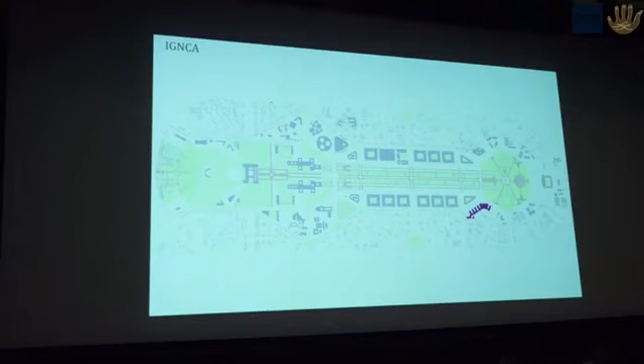More importantly, the National Museum, which is here at present, has wonderful artifacts but a building with very limited space. This will give way for offices, but these two spectacular Lutyens buildings here, presently used as offices, will become the great national museums of our country.

This, I believe, is perhaps one of the most important aspects of this project. Calcutta has the Victoria Memorial, which has been turned into a museum. The Louvre, which used to be the Palace of the King, is being turned into a museum.

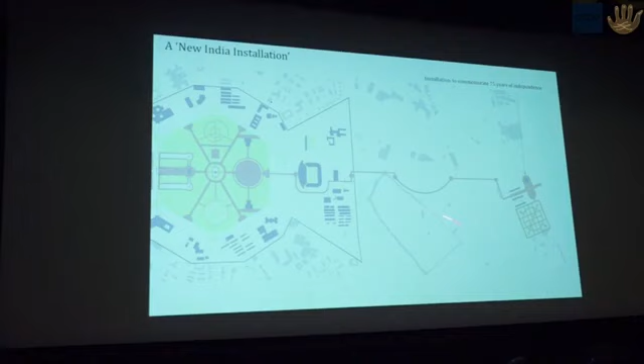The axis is also being extended by creating a garden on axis here and developing a pathway that you can walk up to this end. So that's the New India Installation here, part of this project.

Also at the other end, near the ridge, there's this very important feature. Presently you can see the presidential estate, that's Rashtrapati Bhavan, and these are staff quarters for Rashtrapati Bhavan - there are 1,200 quarters for staff members here.

There is some open area here which has vegetable gardens and a nursery, to be relocated. The vegetable garden and nursery will come here, and that much land will be carved out from the estate as a public facility where there will be an arboretum with glass houses for India's endangered species. That's the proposal still, but one day it will start looking like this.

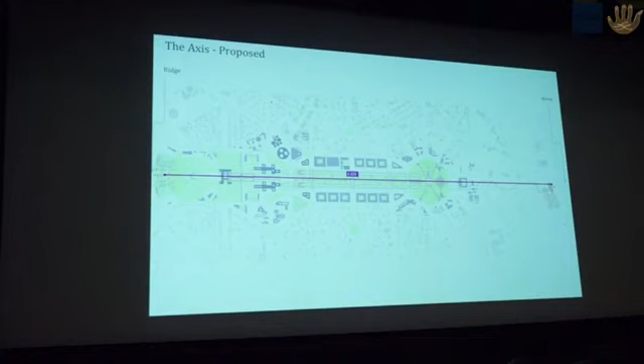So the whole idea of this project is to commemorate 75 years of India's independence by extending the vista from the ridge, so to say, to the river, as the Lutyens had planned, and by expanding public space.

Presently, that green area here is the public space of the central vista. By creating the museums and the arboretum at the back, we will be adding 75 acres of public space - a catchy way of saying 75 acres for 75 years of India's independence.